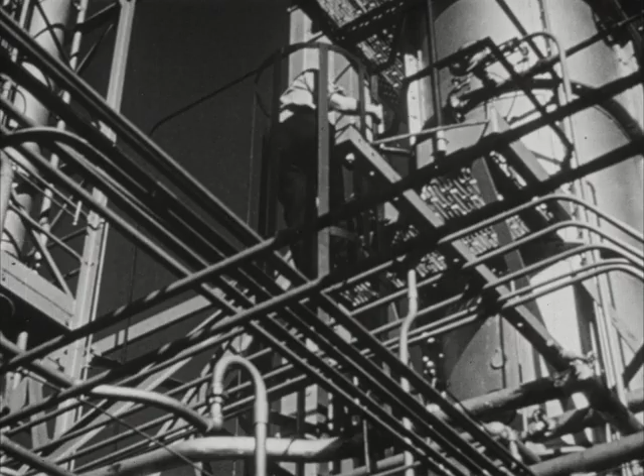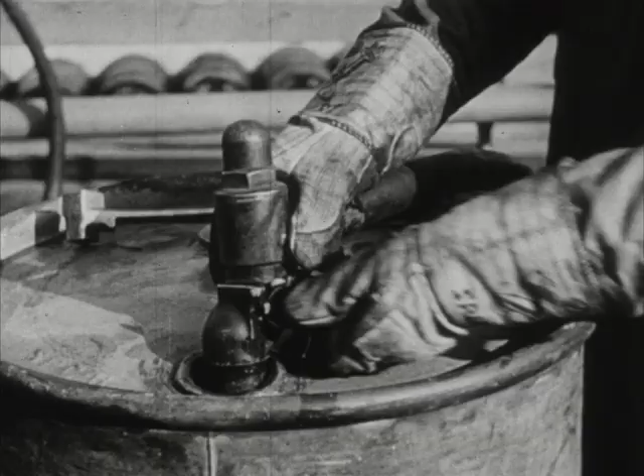Gasoline. Powerful stuff. Modern magic. Our lives, our business, our cities are patterned on motor transportation which gasoline has made possible.

Do you realize what gasoline means to this country? It has added a new freedom to our lives, the freedom of movement, of individual transportation, anywhere, anytime, for everybody in America. And those who make and sell gasoline perform a service, not only to their communities, but to the whole country.

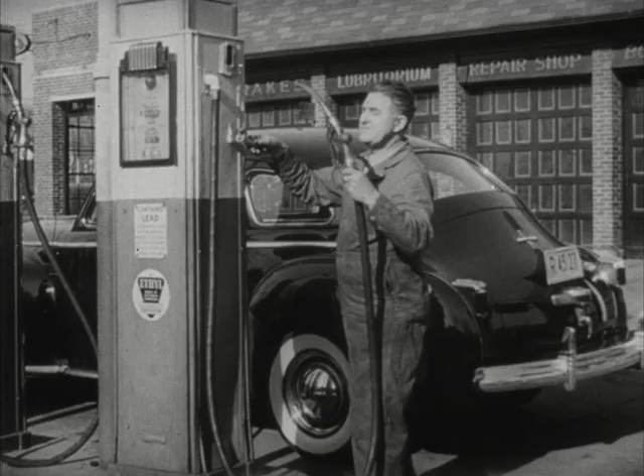But most people just don't realize how much hard work, knowledge, and money it takes before gasoline can come out of a pump and into the tank of an automobile. First, there is the search to find the crude oil that's needed to make gasoline, and that takes plenty of study and special training. They send out crews to make surveys of territories that seem promising, just like prospecting for gold in the old days. Only these men are scientists.

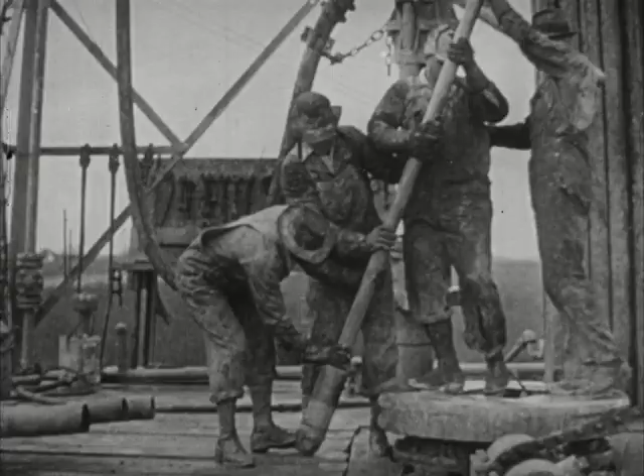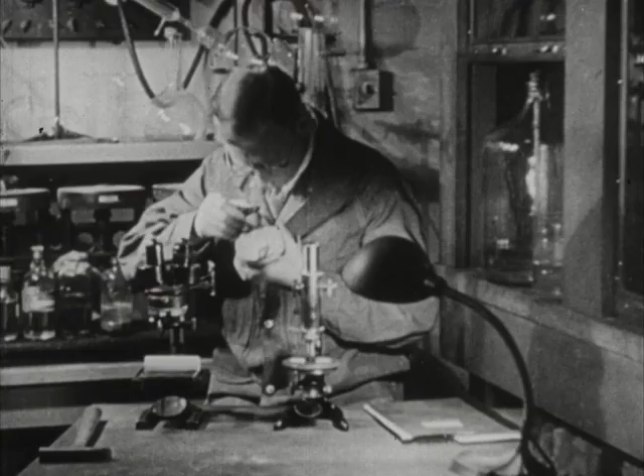They sink test holes and use super-sensitive instruments to find out what the Earth is like far below the surface. If the experts decide the results show the possibility of oil, they are ready for the next step. Usually, they first drill a hole to get actual samples of the Earth itself, cores that show exactly what the Earth is like at different levels. The oil engineers can tell if these samples come from a place that contains crude oil, how good it is, and how much there is.

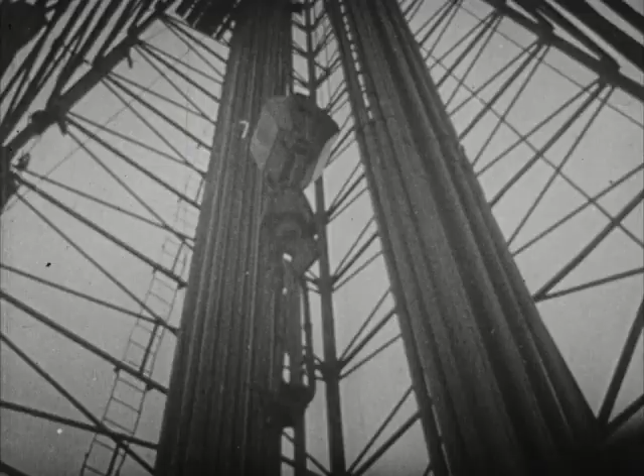Then another big, tough, expensive job gets underway. Clearing the land for drilling, maybe even building roads through wild, rough country. Oil drilling goes on all the time. Thousands of new wells are drilled every year. And because of the scientific way they go about it today, over half of these new wells deliver oil.

Next, there's the job of getting this crude oil from the wells to the refineries. A lot of it travels through pipes, thousands of miles of pipes. Some pipelines extend halfway across the country. And plenty of crude oil is carried in tankers. They also transport finished gasoline to every part of the world. These tankers form one of the biggest merchant fleets we have. And the railroads. They carry oil from the gathering tanks to the refineries, and then gasoline from the refineries to distribution points all over America.

The process of refining crude oil into gasoline and other products is another big part of a big industry. It takes millions and millions of dollars worth of equipment to turn out finished petroleum products. It's a complicated process, but not at all difficult to understand when you realize that every drop of crude oil is a mixture of many small particles or molecules. They're called hydrocarbons because they are compounds containing only hydrogen and carbon.

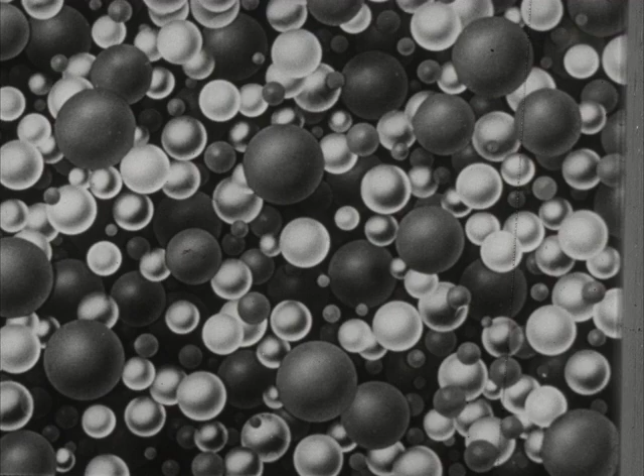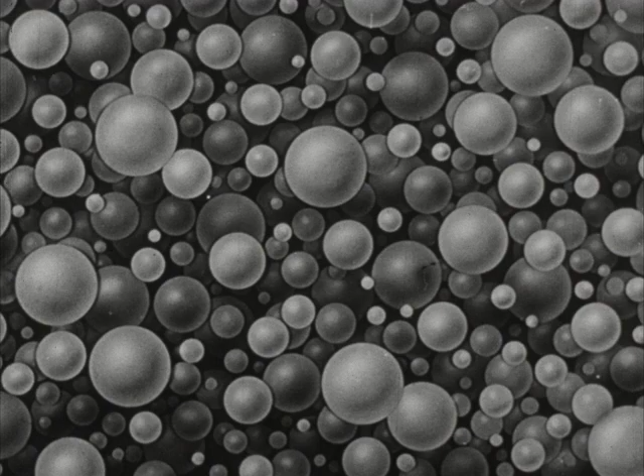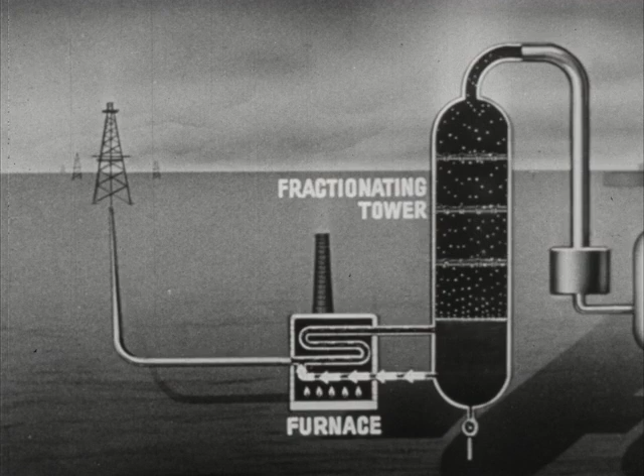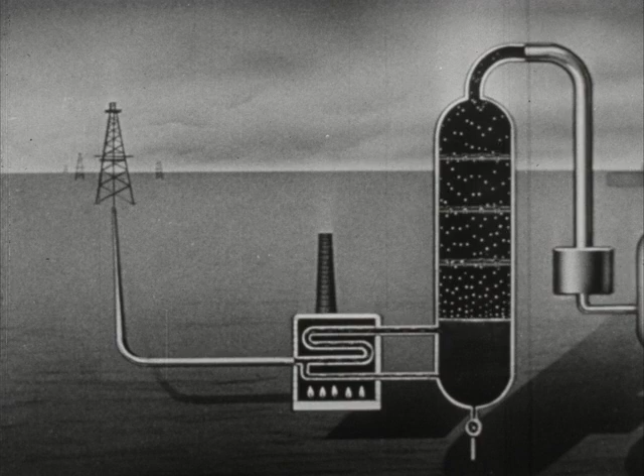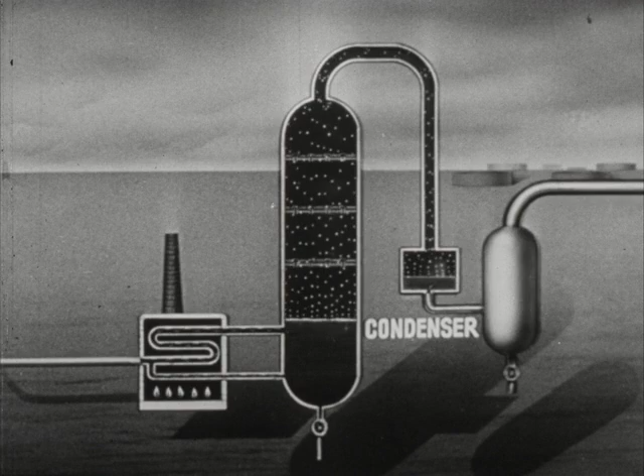The crude oil is heated in a furnace, and the hot oil is pumped into a fractionating tower. The proper temperature is maintained in the tower by recirculating part of the oil through the furnace. The heavy molecules in liquid form concentrate at the bottom of the tower and are drawn off for use as heavy oils. The lighter molecules vaporize, and with the natural gases, move to the top of the column. This mixture of gases and oil vapors flows into a condenser. The vapors condense into liquid gasoline.

The next step is to separate the gases from the gasoline. This is done in a second fractionating tower. The gases move to the top of the tower and are drawn off. The liquid gasoline concentrates at the bottom of the tower. This is what we call straight-run gasoline.

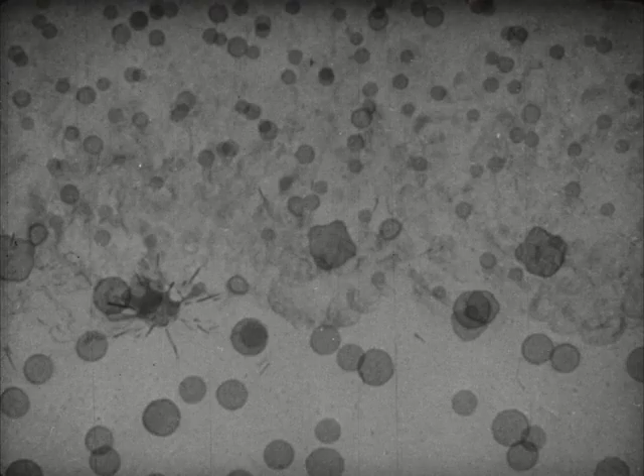In the early days of the automobile, this straight run was the only kind of gasoline we had. But as public demand increased, new ways had to be found to get more gasoline from a given amount of crude oil. So the oil industry developed what is called the thermal cracking process. Certain of the larger molecules of heavy oil are literally cracked into smaller molecules in or near the gasoline range.

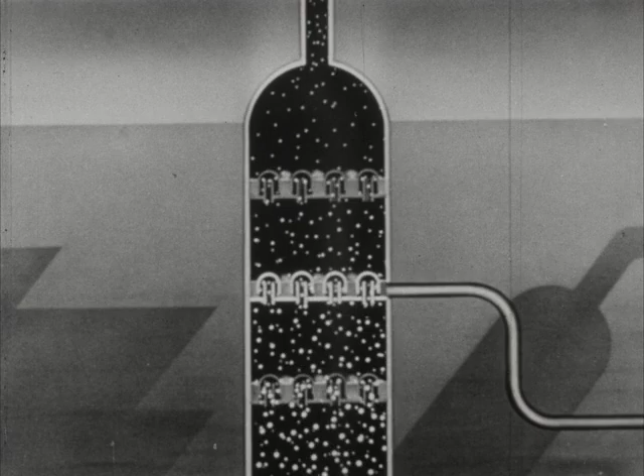In the fractionating tower, the oil molecules tend to collect at various levels according to their size. That's why they call it a fractionating tower. The molecules collect in groups or fractions. This makes it easy to take off the group of medium weight molecules that are best suited for use as cracking stock. These molecules are piped to a thermal cracking furnace, where by heat and pressure, they are cracked into smaller molecules.

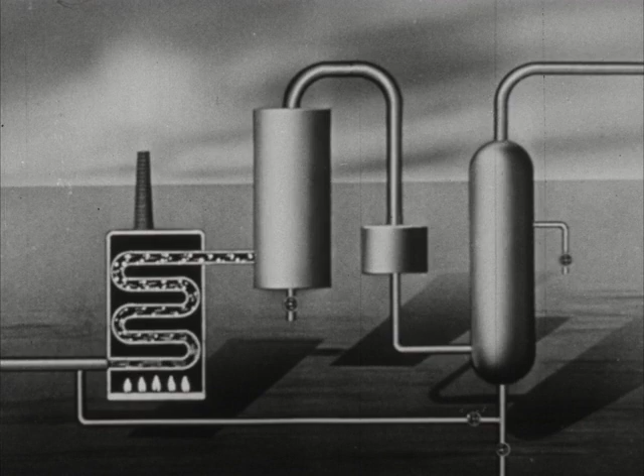At the same time, a lot of other things happen to the chemical structure of the molecules, and a kind of synthetic crude oil results, with molecules of all sizes, but almost half of them are in the gasoline range. This goes into a flash tower where the smaller molecules vaporize. Those that are too heavy are drawn off and used as asphalt, coke, tar, and so on. The lighter molecules move to the top of the tower and then to a condenser where they again become liquid.

To separate them, they go to another fractionating tower. The heavier oil collects at the bottom and is drawn off as cracked fuel oil. The lighter molecules move toward the top, condense, and are taken off at their proper level as thermally cracked gasoline. The gases formed during the cracking process move to the extreme top of the tower and are piped off.

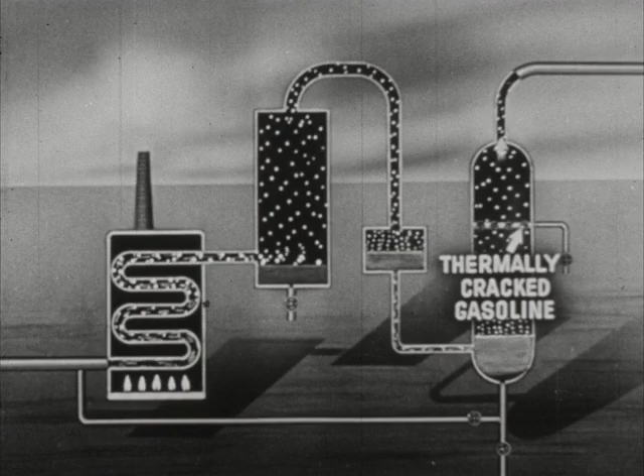Also, to obtain more gasoline, some of the cracked fuel oil is piped back to the thermal cracking furnace and goes through a second cracking process, again increasing the amount of gasoline obtained from a given quantity of crude oil. In recent years, the industry has tremendously expanded a comparatively new cracking process called catalytic cracking. A catalyst causes a desired reaction to take place without being affected itself. In cracking gasoline, the catalyst is in the form of beads or a fine powder-like material.

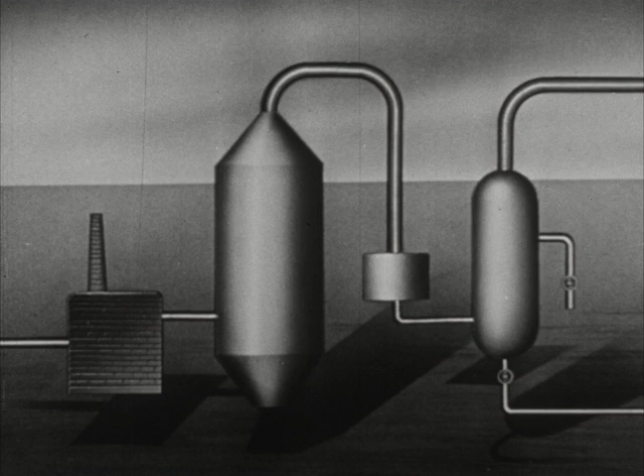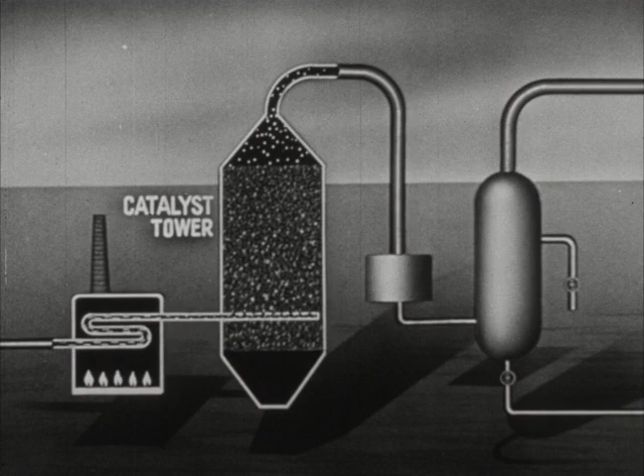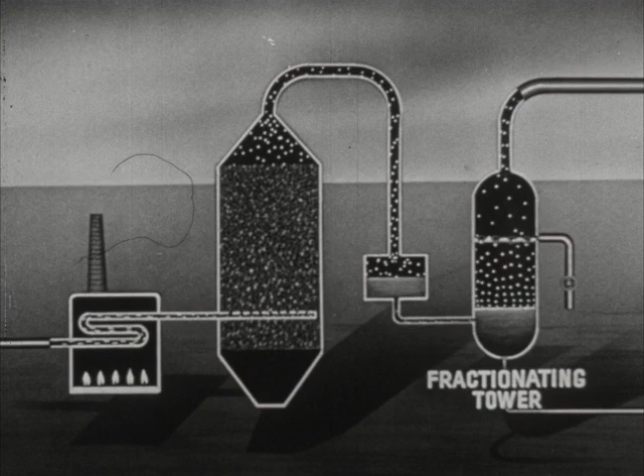In this process, heavier molecules of oil above the gasoline range are piped into a furnace and heated. The hot oil vapors then go into the catalyst tower, where they contact the catalyst. This not only cracks the molecules down to smaller size, but changes their chemical structure to make them suitable for gasoline. These smaller molecules then go to a condenser, where they become liquid, and then to a fractionating tower. Again, the liquid that is too heavy for gasoline collects at the bottom and is drawn off as cracked fuel oil. Gasoline is drawn off at its proper level, and this is what we call catalytically cracked gasoline.

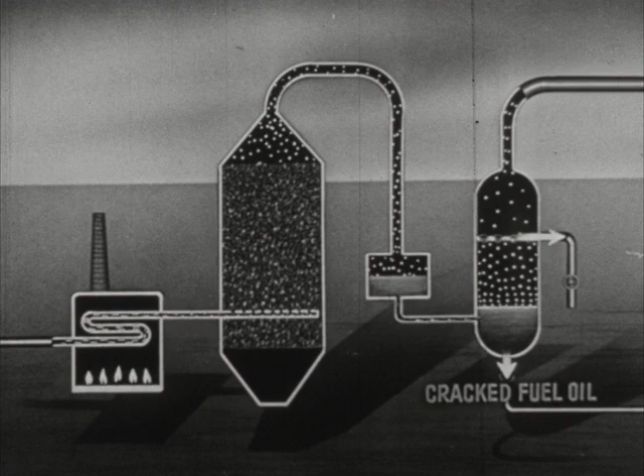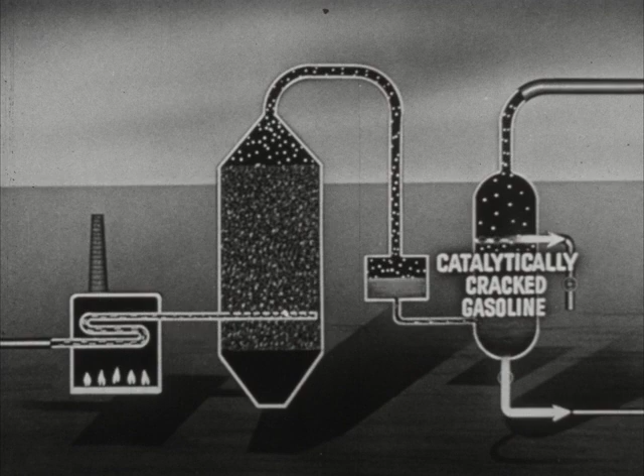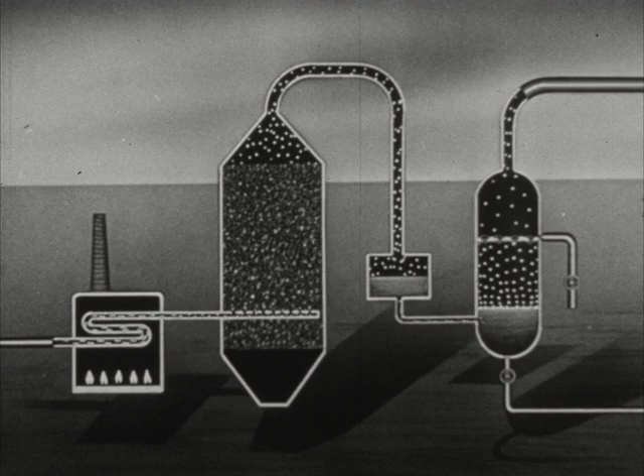In many operations, even more gasoline is obtained by sending some of the catalytically cracked fuel oil into the thermal cracking process. The gases, as usual, collect at the top and are piped off. In every process, gases have been produced. These used to be burned away as waste or used as gas. But to conserve our natural resources and to obtain the largest possible amount of gasoline from the crude oil, the oil industry discovered how to make gasoline from some of these gases too, by a process of polymerization. This is just the reverse of cracking.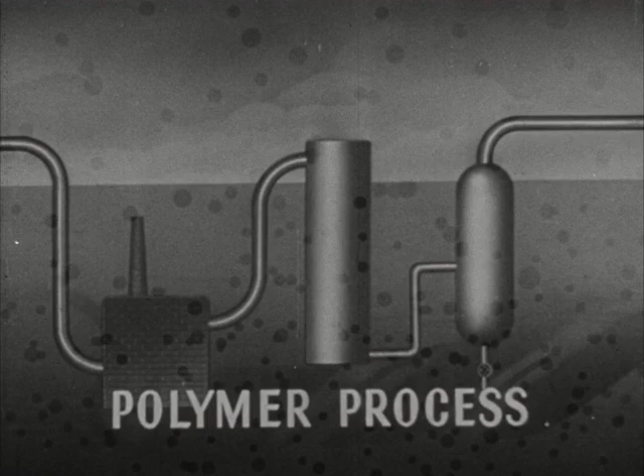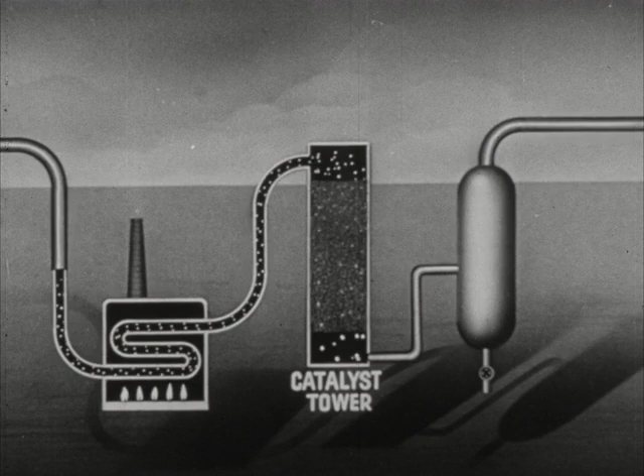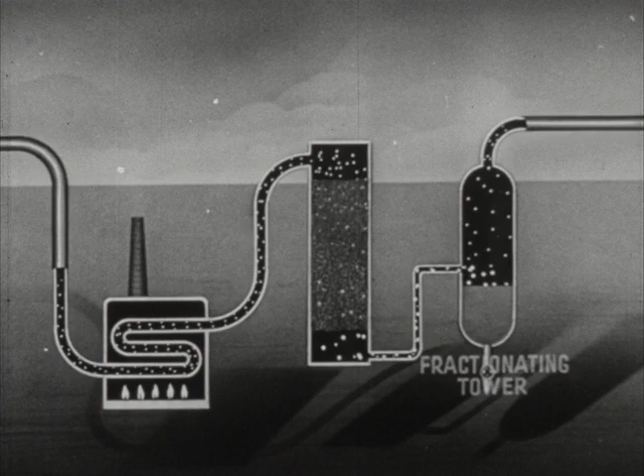Polymerization simply means combining very small molecules to form larger molecules. So the smaller molecules that are lighter than gasoline are combined into larger molecules from which gasoline can be made. The gas is piped into a furnace and heated. The hot gas goes to a catalyst tower. By contact with a suitable catalyst, usually phosphoric acid, a chemical reaction occurs which causes the molecules to unite and form larger molecules. These larger molecules go into a fractionating tower. Those in the gasoline range condense to liquid, and this is drawn off as polymer gasoline. Those that are still too light are drawn off the top as fuel gas.

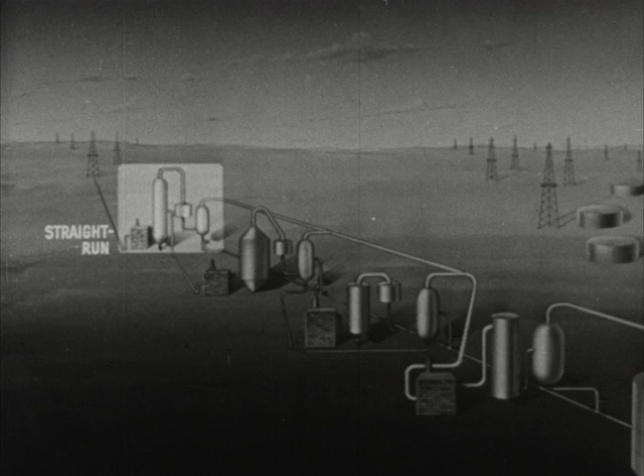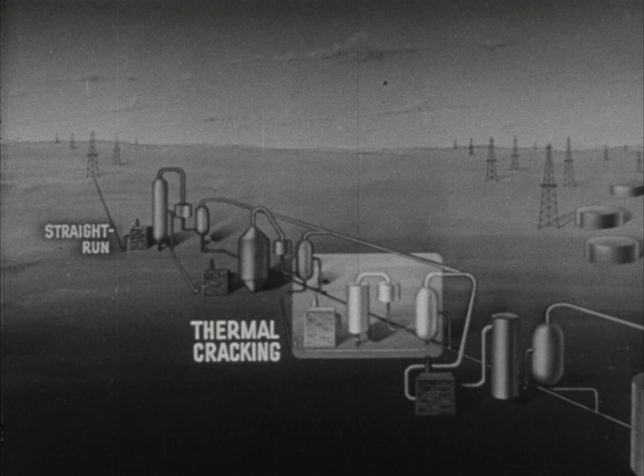So we have four main types of gasoline refining processes. Straight run, in which gasoline is vaporized from crude oil by simple heating. Thermal cracking, in which heat and pressure are used to split heavy oil molecules into smaller molecules suitable for gasoline. Catalytic cracking, in which a catalyst is used to split heavier oil molecules, and the polymer process, in which small gas molecules are combined to form larger molecules and condensed to liquid.

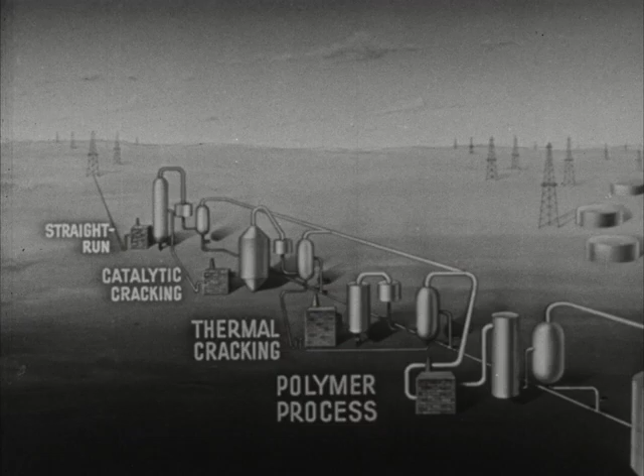Certain of these processes produce gasolines of superior anti-knock quality. Gasolines from other processes can be stepped up by blending with materials such as alkylate or benzol. Most refiners, however, find it advantageous to add Ethyl brand of anti-knock compound to their gasolines. It ensures high anti-knock quality for their entire output. For more than 20 years, Ethyl brand of anti-knock compound has helped the petroleum industry to bring out better and better gasoline. We've seen what better gasoline has meant in producing better automobiles with engines that give increasingly better power and better performance.

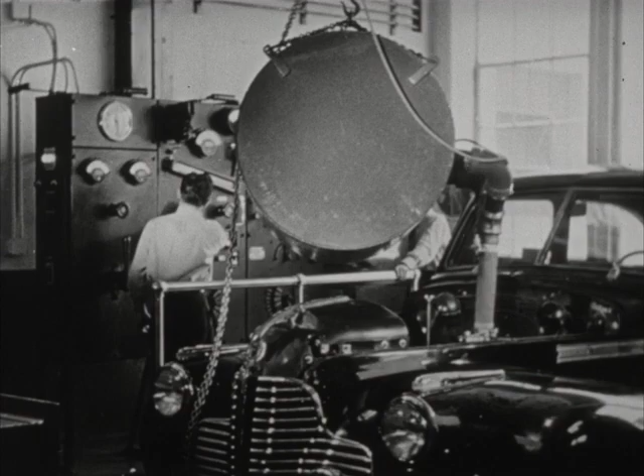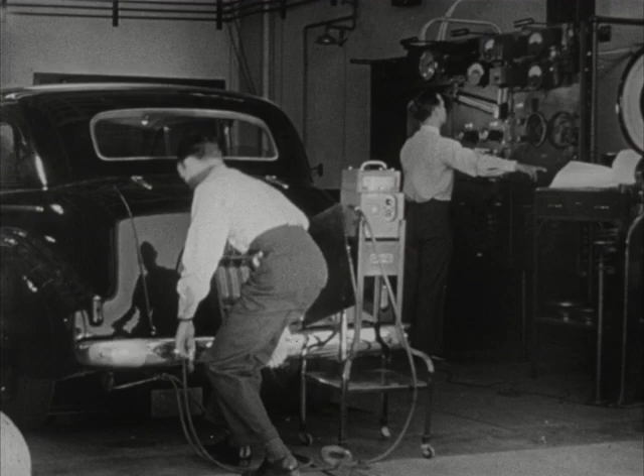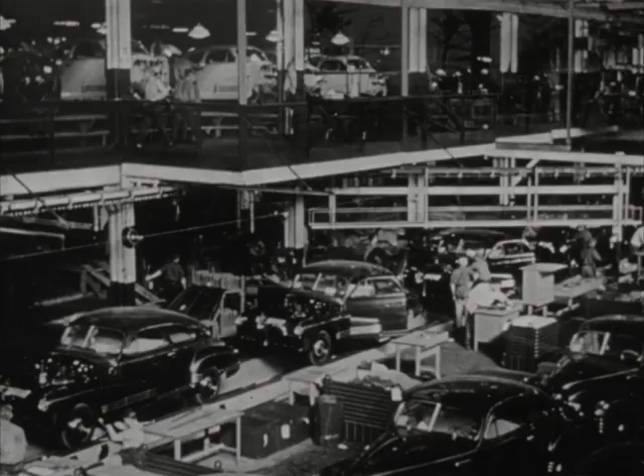This progress is the result of the constant endeavor of the oil and automotive companies to fit engines to fuels and fuels to engines, an endeavor in which Ethyl research engineers, today as in years past, are working in close cooperation with both industries. And as our progressive American oil industry, with research and ingenuity, continues to improve gasoline, automotive engineers will design new and better engines capable of converting this extra available power into greater efficiency, more economy, faster, smoother, more resilient power on the highway, on the farm, in the air, and on the water. For this is the age of motor transportation, with gasoline for everybody.